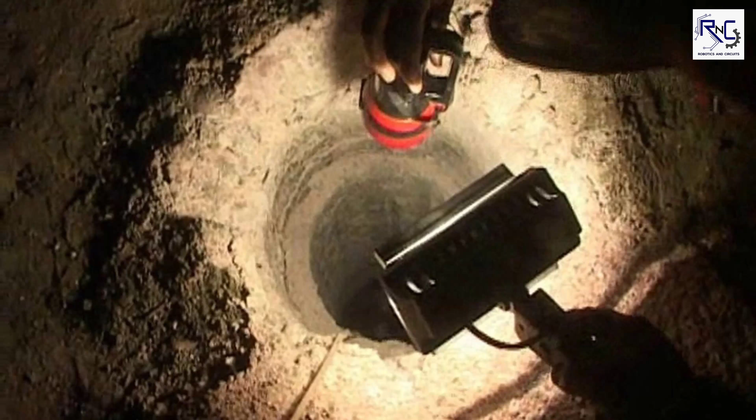In India, recently we have witnessed some of the most tragic and helpless incidents where many young lives have been taken due to falling into borewells. Borewells are typically small in diameter, ranging from 4.5 inches to 12 inches. India is the biggest user of groundwater in the world and has over 27 million borewells meant to extract water.

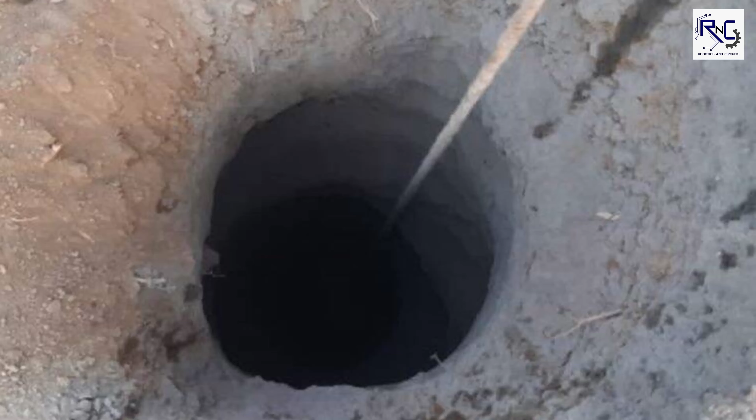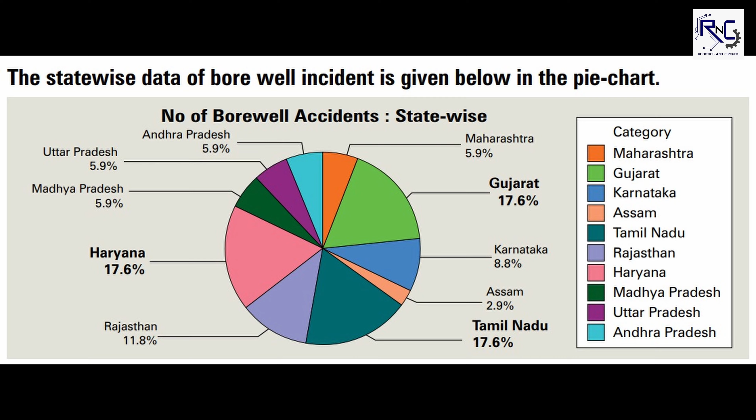Once the water dries up, the motor and the PVC pipe that is inserted along the depth of the well are removed, while the outer surface is not covered properly. Children playing near these abandoned borewells happen to fall deep into them. As the statistics suggest, in the consecutive years starting from 2009, more than 40 deaths have occurred while being stuck in borewells. The most mournful fact is that 92% of these victims are under the age of 10. This distress situation still continues despite all measures taken.

The rescue process to save a child from a borewell is long and complicated. An incident was highlighted in 2006 where a 5-year-old child named Prince was rescued by the Indian Army after a tough combat that lasted 49 hours. Statistics reveal that not many kids were as lucky as Prince. An incident in Indore took place in the same year where a child named Deepak was stuck in the pit hole and died due to the lack of oxygen.

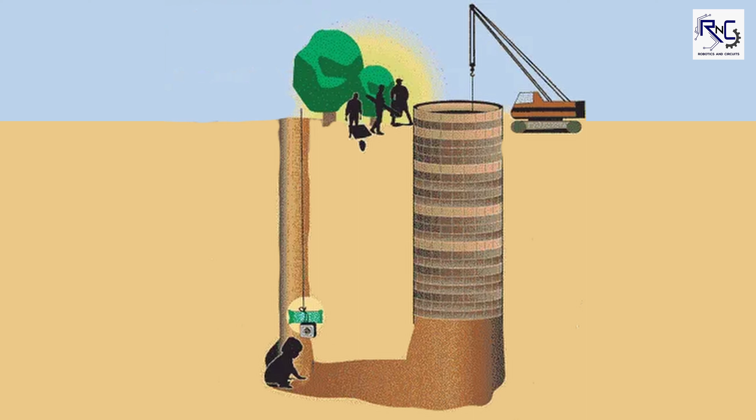The rescue mission is dependent on various crucial factors such as its location, diameter, depth of the borewell, availability of digging equipment, oxygen, lighting facilities, and the nature of the soil. The conventional method involves a parallel hole that is dug to the depth of the borewell in which the child is, and a horizontal hole is subsequently dug to connect the two vertical holes. However, this requires considerable resources in terms of rescue workers and heavy machinery. In the absence of any equipment, this leads to the failure of the operation.

These methods are time-consuming and are often delayed if, while digging the parallel hole, the diggers strike a hard rock. Such exigencies affect the chances of rescuing the child alive. Also, because of the lack of oxygen and deathly atmosphere, children die slowly before the rescue team can reach them.

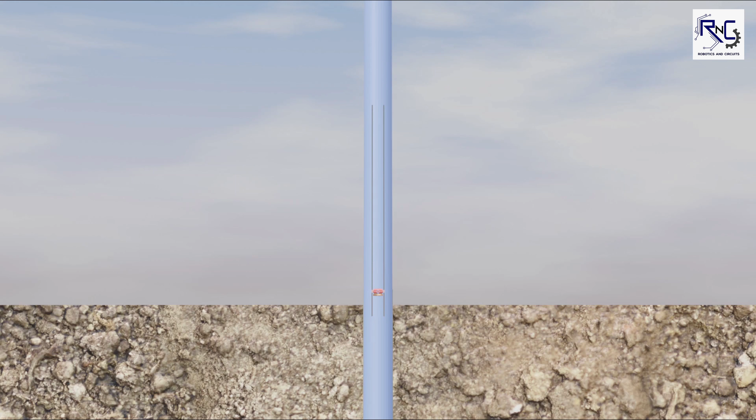First, the depth at which the subject is stuck is measured, and according to that, ropes are arranged to send the system down. The diameter of the borewell is then measured, and according to the diameter, a rod is lowered within a channel made by the locking slot of flaps of both the arms. With this locking mechanism, the flaps will fold when it reaches below the subject and prevent further falling of the subject. A liquid supplement tank is also filled before deploying the system.

After completing the initial setup and taking all the necessary measurements, the system is sent down with the help of ropes. A gyroscope informs the operator of any deviation and helps to maintain the balance of the system. A camera and lights give 360-degree coverage throughout the operation. The camera helps us to detect the space or gaps that we can use and align the device with these spaces.

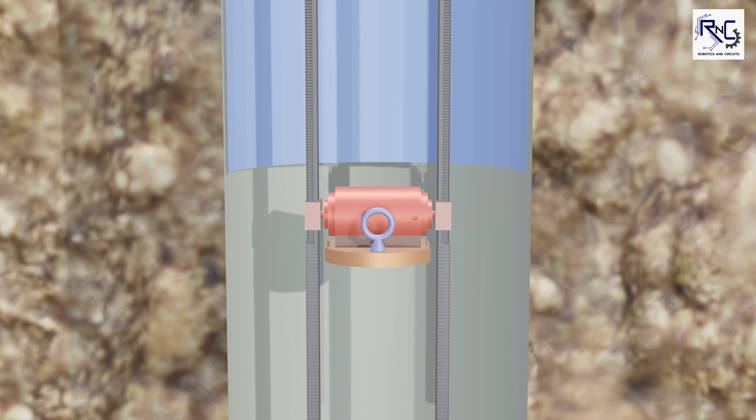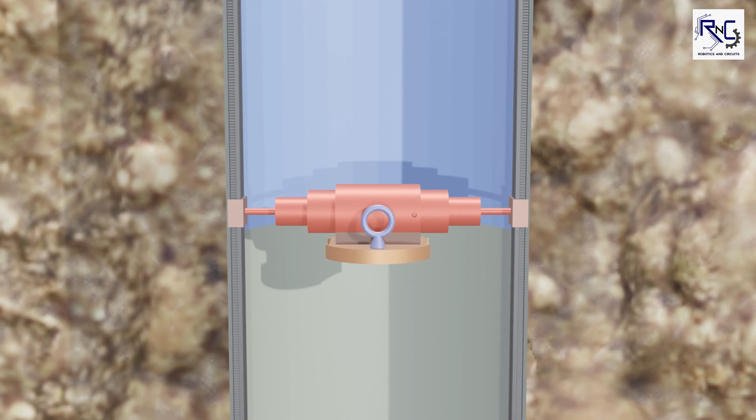After acquiring the right depth, a double-acting telescopic hydraulic cylinder extends with arms on both sides according to the diameter of the borewell, without creating any disturbance which might increase the risk of collapsing of the walls of the borewell. Then, a slider mechanism sends the arm from those gaps below the subject and the strings are pulled, which closes the flaps, hence preventing the subject from further falling inside the borewell.

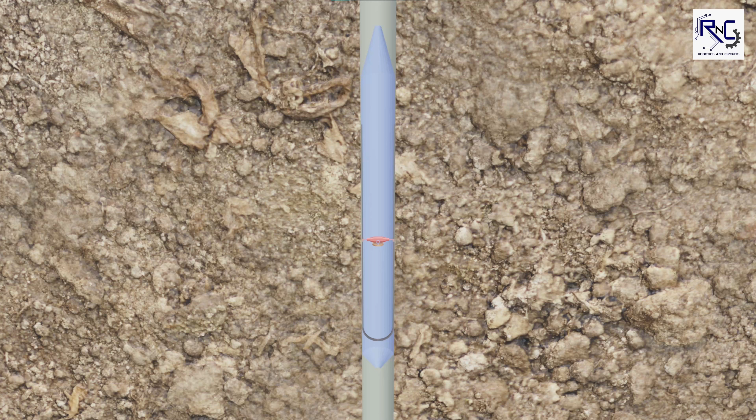Now, the reinforced fabric is deployed, which acts as a shield against the surface of the borewell. It encloses the subject into an envelope, hence protecting the subject from toxic gases present inside the borewell. Now, oxygen is supplied to the subject. After the fabric covers the subject, the system is pulled out together with the subject.

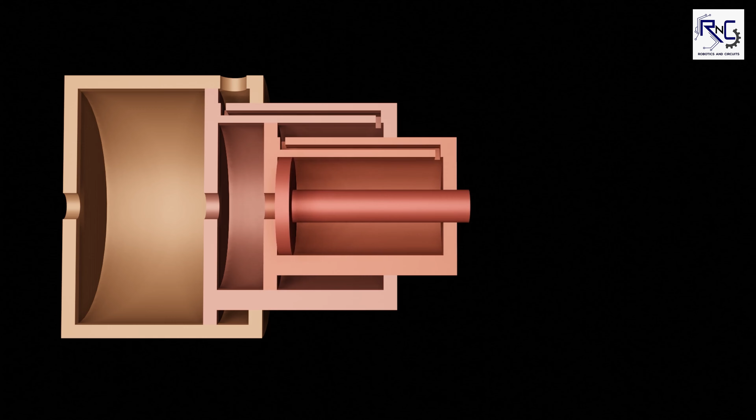A double-acting telescopic hydraulic cylinder is used to control the arms of the system. It has a 3-stage mechanism that reduces the mounting space required for the cylinder. The pistons, when extended, will have a size of up to 10 inches and 4 inches in the retracted state. The hydraulic system acts as a cushioning mechanism on both sides to help reduce the pressure exerted on the walls of the borewell.

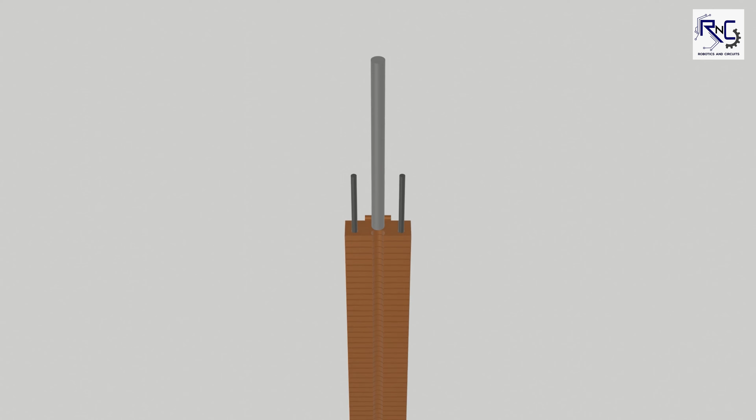The flaps are made up of folding links with a locking slot which allow them to fold according to the diameter of the borewell. A rod is lowered within a channel made by the locking slot at the time the system is prepared to be lowered. When the arms reach below the subject, the strings are pulled, which results in closing of the flaps, thus securing the subject. The length of the arm is 6 feet and can be lowered as per the height requirements of the subject.

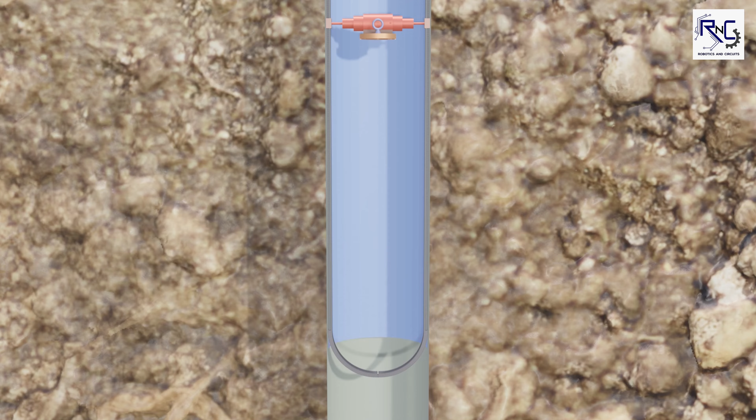The reinforced fabric acts as a shield against the surface of the borewell, which prevents friction injuries and also ensures that the subject does not fall further down. The fabric is made up of a strong and flexible composite material which is reinforced by steel wires that act as a hard shield when it is closed by tightening both the ends. It also provides protection against falling debris. When the subject is enclosed in the fabric, oxygen can be supplied to the subject in an effective manner, and it will also protect the subject from toxic gases which may be present inside the borewell.